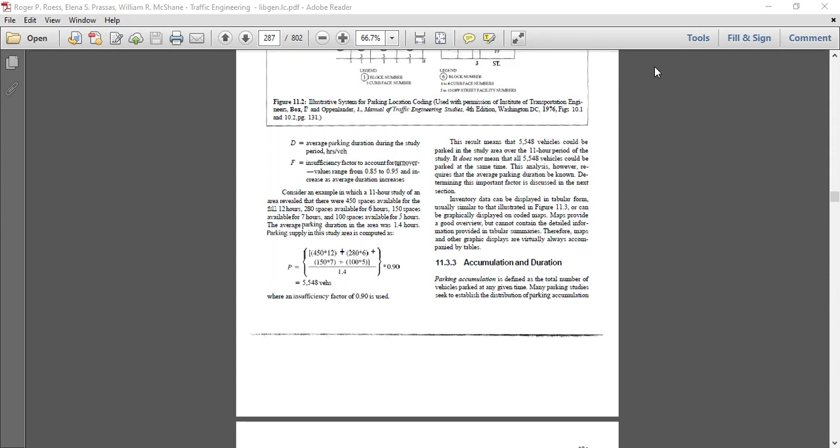Parking accumulation is defined as the total number of vehicles parked at any given time. Many parking studies seek to establish the distribution of parking accumulation over time to determine the peak accumulation when it occurs. Of course, observed parking accumulations are constrained by parking supply. Thus, parking demand that is constrained by lack of supply must be estimated using other means.

Nationwide studies have shown that parking accumulation in most cities has increased over time. Total accumulation in an urban area, however, is strongly related to the urbanized area population, as illustrated in the figure. Parking duration is the length of time that individual vehicles remain parked. This characteristic is therefore a distribution of individual values, and both the distribution and the average value are of great interest. Like parking accumulation, average parking durations are related to the size of the urban area, with average duration increasing with urban area population as shown in the figure.

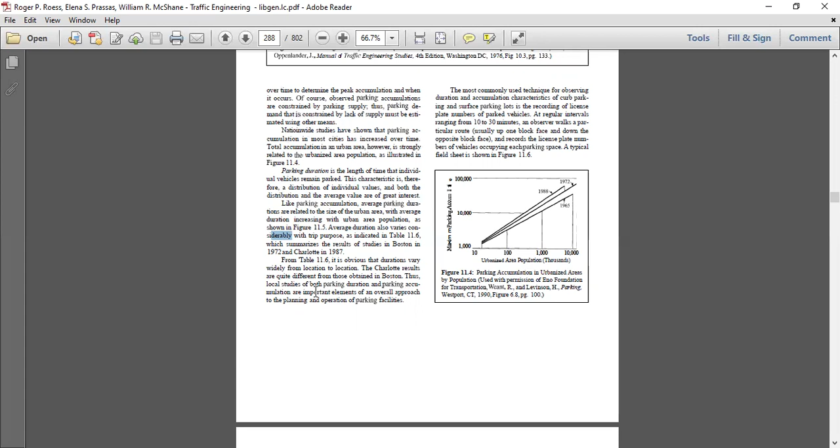Average duration also varies considerably with the trip purpose as indicated in the table, which summarizes the results of studies in Boston in 1972 and Charlotte in 1987. Okay, so accumulation totals. Each column of each field sheet is summed to provide the total accumulation of parked vehicles within each time period on each observer route. Duration distribution: by observing the license plate record of each space, vehicles can be classified as having been parked for one interval, two intervals, three intervals, etc. By examining each line of each field sheet, a duration distribution is created.

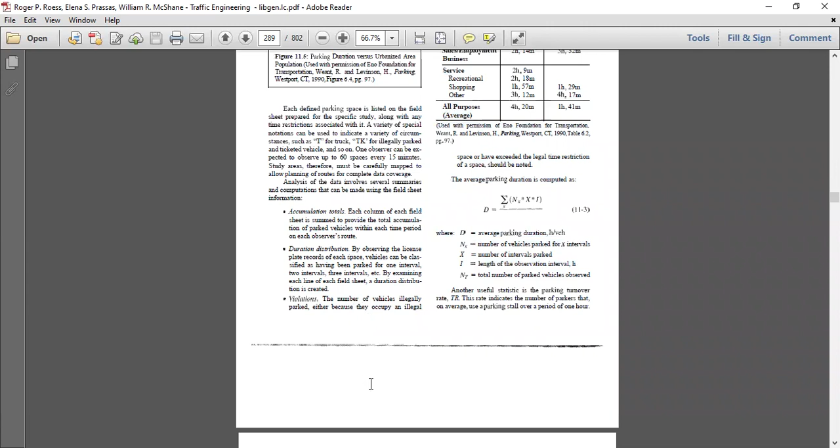Violations: the number of vehicles illegally parked, either because they occupy an illegal space or have exceeded the legal time restriction of a space, should be noted. The average parking duration is computed as D equals sigma of N_x into X into I, upon N_T.

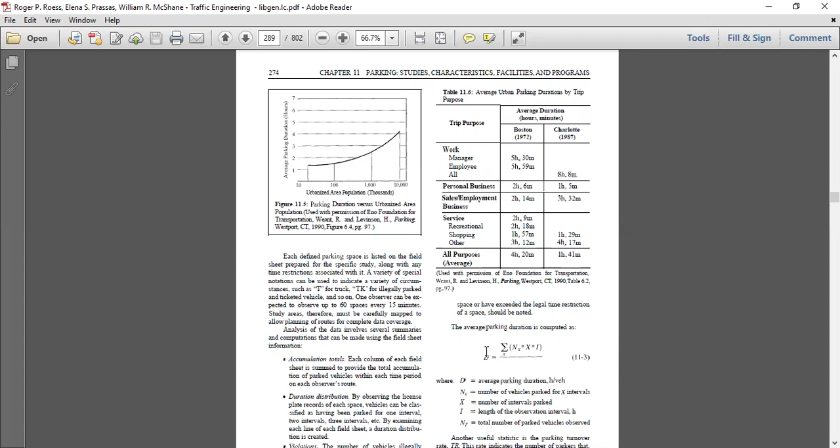Next, other types of parking studies. A number of other techniques can be used to gain information concerning parked vehicles and the parkers. Origin of the parked vehicle can be obtained by recording the license plate numbers of parked vehicles and petitioning the state motor vehicle agency for home addresses. This technique, which requires special permission from the state authorities, is frequently used at shopping centers, stadiums, and other large trip attractors. Interviews of parkers are also useful and are most easily conducted at a large trip attraction location. Basic information on trip purpose, duration, distance walked, etc. can be obtained. In addition, attitudinal and background parker characteristic information can also be obtained to gain greater insight into how parking conditions affect users.

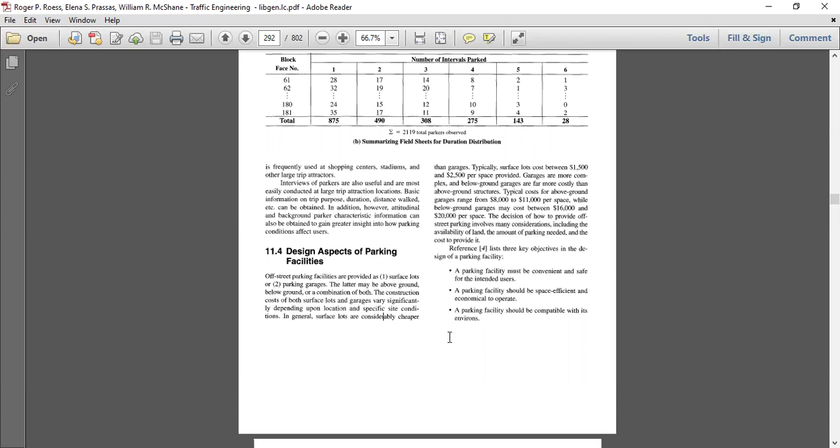Design aspects of parking facilities. Off-street parking facilities are provided as surface lots or parking garages. The latter may be above ground, below ground, or a combination of both. The construction cost of both surface lots and garages varies significantly depending upon the location and the specific site conditions. In general, surface lots are considerably cheaper than garages. Typically, surface lots cost between 1,500 and 2,500 per space provided. Garages are more complex, and below ground garages are far more costly than above ground structures. So this justifies the typical cost of on-surface parking and off-surface parking like above ground or below ground.

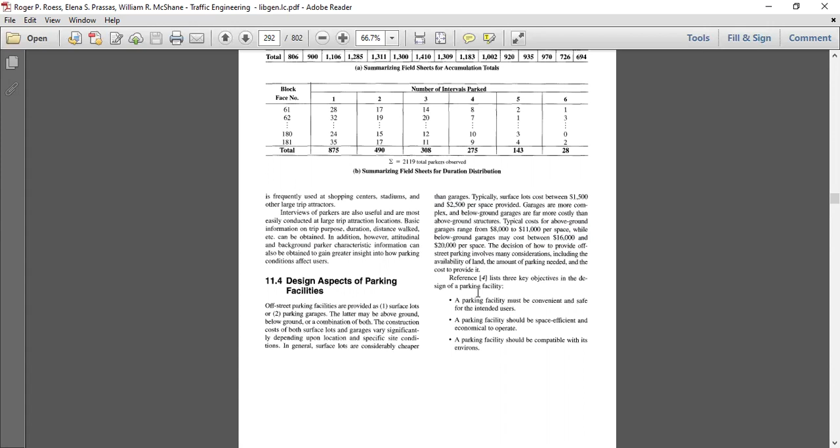A parking facility must be convenient and safe for the intended users. A parking facility should be space efficient and economical to operate. A parking facility should be compatible with its environs.

Convenience and safety involves many issues, including proximity to major destinations, adequate access and egress facilities, a simple and efficient internal circulation system, adequate stall dimensions, and basic security. The latter refers to security against theft of vehicles and security from muggings and other personal crime.

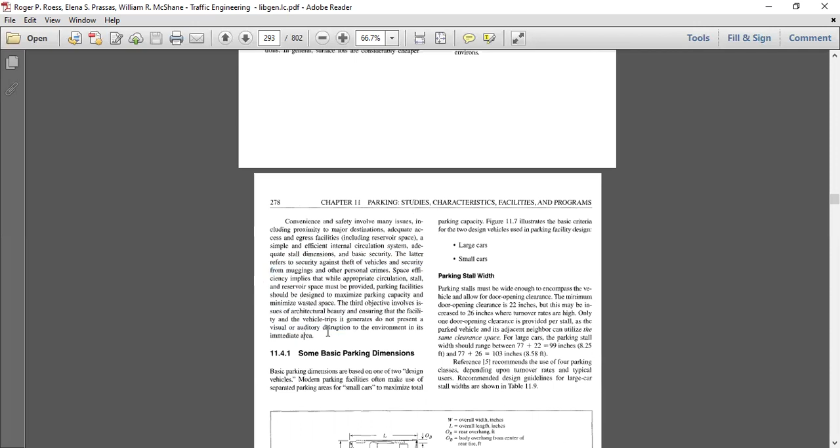Space efficiency implies that while appropriate circulation, stall, and reservoir space must be provided, parking facilities should be designed to maximize parking capacity and minimize wasted space. The third objective involves issues of architectural beauty and ensuring that the facility and the vehicle trips generated do not present a visual or auditory disruption to the environment in its immediate area.

Some basic parking dimensions. Basic parking dimensions are based on one of two design vehicles. Modern parking facilities often make use of separated parking areas for small cars to maximize the total parking capacity. The figure illustrates the basic criteria for the two design vehicles used in parking facility design, the large cars and the small cars.

Parking stall width. Parking stalls must be wide enough to encompass the vehicle and allow for door opening clearance. The minimum door opening clearance is 22 inches, but this may be increased to 26 inches where turnover rates are high. Only one door opening clearance is provided per stall, as the parked vehicle and its adjacent neighbor can utilize the same clearance space.

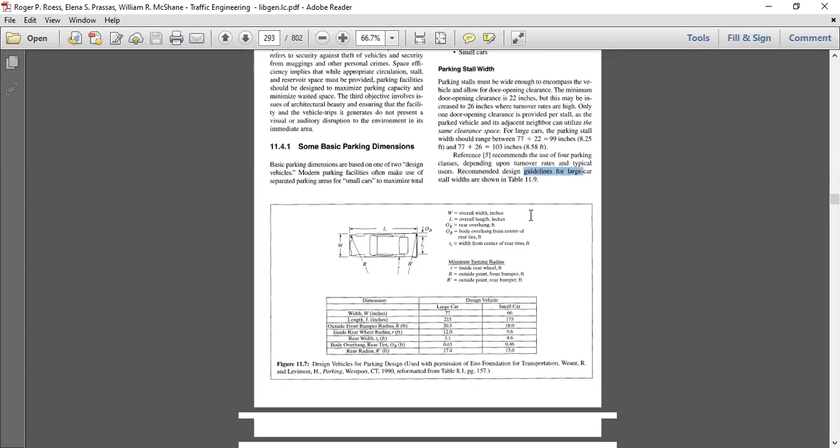For the large car, the parking stall width should range between 77 plus 22, 99 inches, and 77 plus 26, 103 inches. The reference recommends the use of four parking classes depending upon the turnover rates and the typical users. Recommended design guidelines for the large car stall are as shown in the figure.

For small cars, these guidelines suggest a parking stall width between 66 plus 22, which is equal to 88 inches, and 66 plus 26, which is 92 inches. A 7.6 feet design standard is often applied to small car stall widths. The reference suggests a design width of 8 feet for parking classes A and B and 7.5 feet for parking classes C and D.

Parking stall length and depth. Parking stall length is measured parallel to the parking angle. It is generally taken as the length of the design vehicle plus 6 inches for bumper clearance. This implies a length of 215 plus 6, 221 inches, for large cars and 175 plus 6, 181 inches, for small cars. The depth of the parking stall is the 90-degree projection of the design vehicle length and 6-inch bumper clearance.

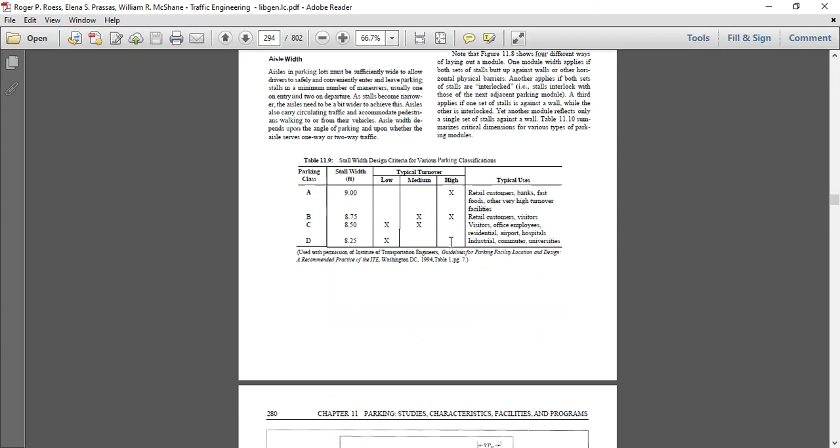For a 90-degree parking stall, the length and the depth of the stall are equivalent. For other angle parking, the depth of the stall is smaller than the length. Okay, so this is kind of the factual data.

The next is parking modules. Parking modules refers to the basic layout of one aisle with a set of parking stalls on both sides of the aisle. There are many potential ways to lay out a parking module. For 90-degree stalls, two-way aisles are virtually always used, as vehicles may enter the parking stall conveniently from either approach direction. Where angle parking is used, vehicles may depart in the same direction.

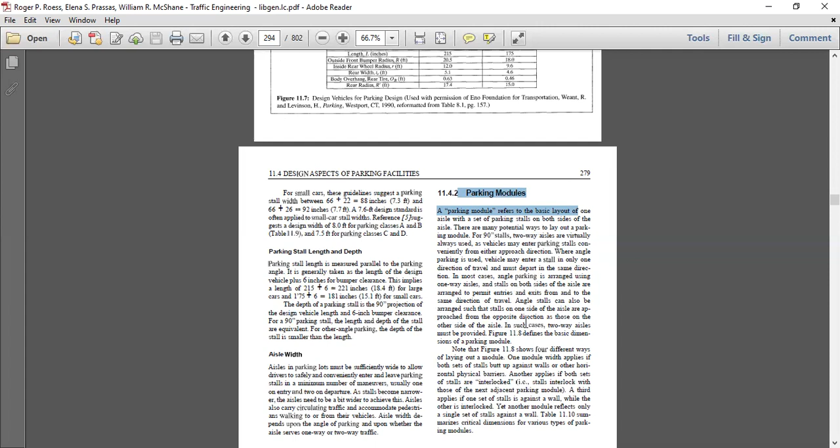In most cases, angle parking is arranged using one-way aisles, and the stalls on both sides of the aisle are arranged to permit entries and exits from and to the same direction of travel. Angle stalls can also be arranged such that the stalls on one side of the aisle are approached from the opposite direction as those on the other side of the aisle. In such cases, two-way aisles must be provided.

Note that the figure shows four different ways of laying out a module. One module applies if both sides of the stalls butt up against a wall or other physical barriers. Another applies if both sides of the stalls are interlocked. A third applies if one set of stalls is against the wall while the other is interlocked.

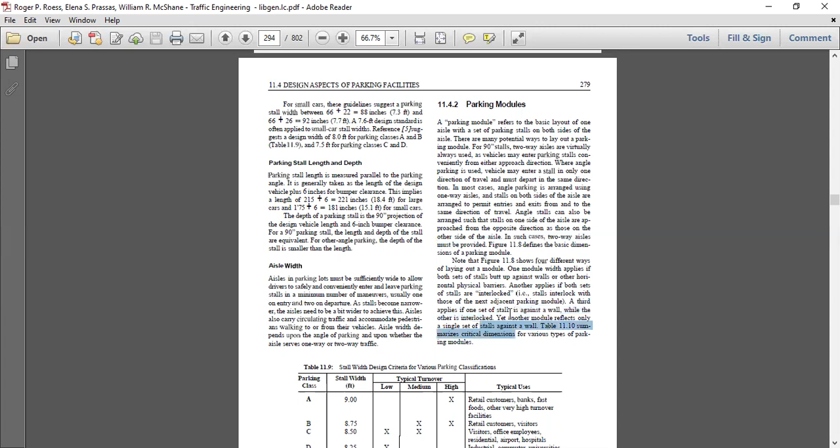Yet another module reflects only a single set of stalls against the wall for the various types of parking modules. Providing separate parking areas for large and small vehicles presents a number of operating problems. Areas must be clearly signed and circulation must allow drivers to easily get to both types of parking space, as the mix of small and large cars is variable.

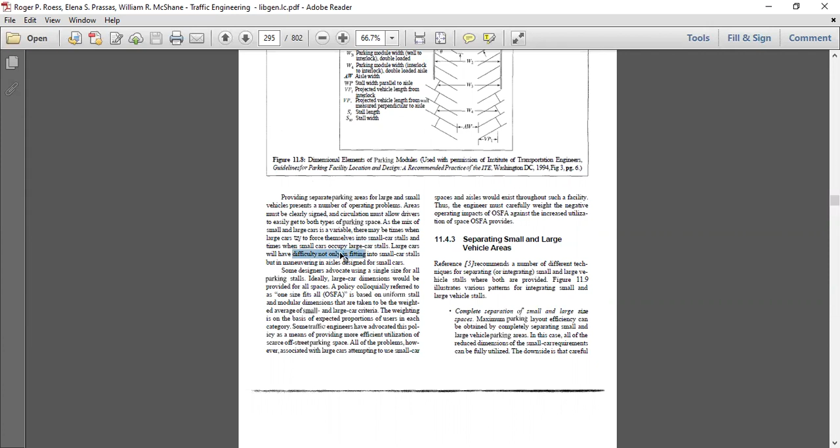There may be times when large cars try to force themselves into the small car stalls, and times when small cars occupy large car stalls. Cars will have difficulty not only in fitting into small car stalls, but in maneuvering in aisles designed for small cars. So this is kind of the parking modules.

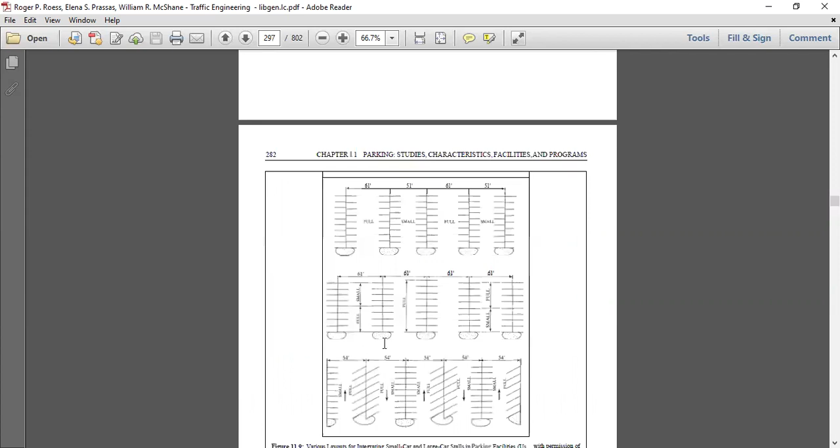Okay. So the last topic is parking problems. Every urban governmental unit must have a plan to deal effectively with the parking needs and associated problems. Parking is often a controversial issue, as it is of vital concern to the business community in general, and the particular businesses that are especially sensitive to parking. Further, parking has an enormous financial aspect as well.

In addition to the impact of parking on the accessibility and the financial health of the community at large, parking facilities are expensive to build and to operate. On the flip side, revenues from parking fees are also enormous. The public interest in parking falls within the government's general responsibility to protect the health, safety, and welfare of its citizens.

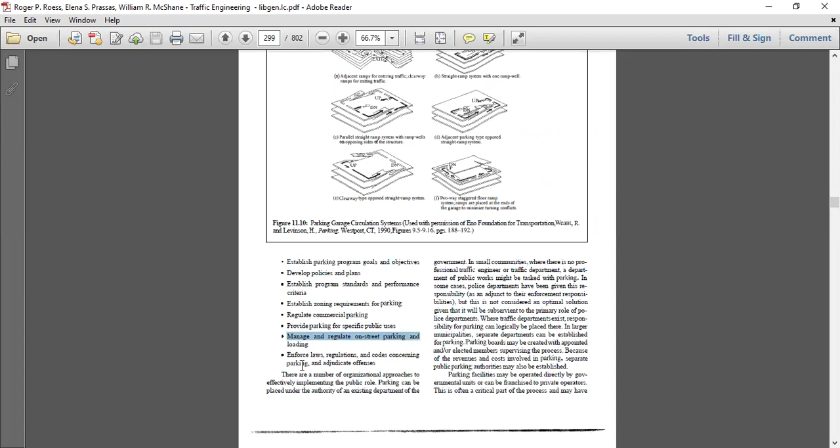Thus, the government has a responsibility to establish parking goals and objectives, develop policies and plans, establish program standards and performance criteria, establish zoning requirements for parking, regulate commercial parking, provide parking for specific public uses, manage and regulate on-street parking and loading, and enforce laws, regulations and codes concerning parking and adjudicate offenses.

There are a number of organizational approaches to effectively implementing the public role. Parking can be placed under the authority of an existing department of the government in small communities where there is no professional traffic engineer or traffic department. A department of public works might be tasked with parking. In some cases, police departments have been given this responsibility, but this is not considered an optimum solution, given that it will be subservient to the primary role of the police department.

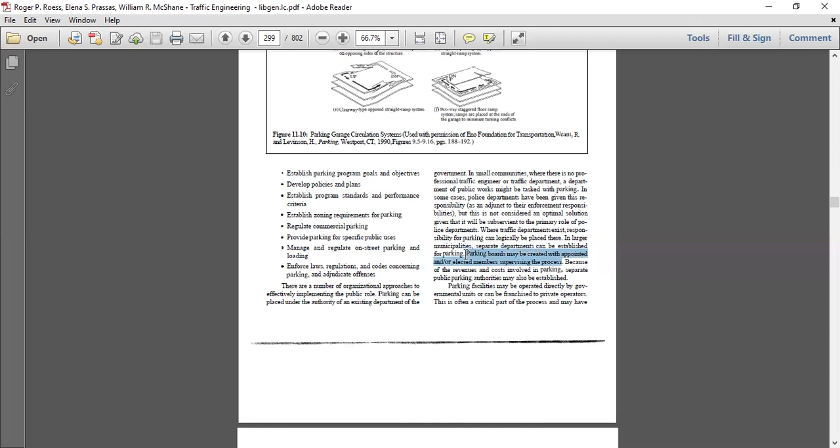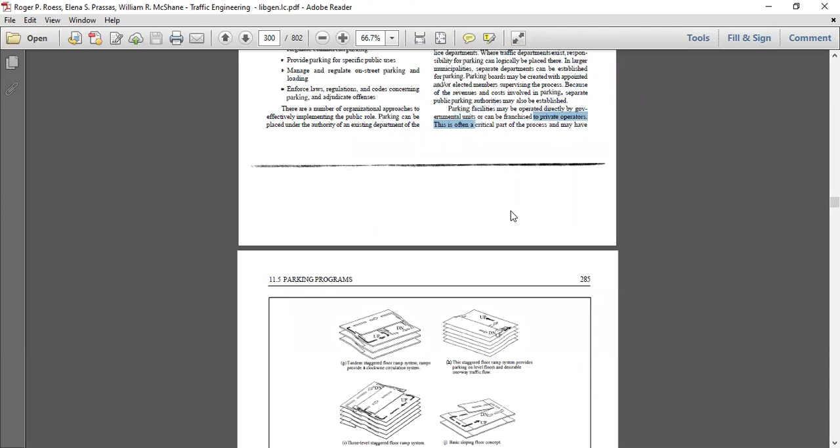Where a traffic department exists, responsibility for parking can logically be placed there. In larger municipalities, separate departments can be established for parking, or boards may be created with appointed or elected members supervising the process. Because of the revenues and the costs involved in parking, separate public parking authorities may also be established. Parking facilities may be operated directly by governmental units or can be franchised to private operators. This is often a critical part of the process and may have a substantial impact on the net revenues from parking that find their way into the public coffers.

Parking policies vary widely depending upon the local circumstances. In some major cities, parking supply is deliberately limited, and the costs are deliberately kept high as a discouragement to driving. Such a policy works only where there is a significant public transport supply to maintain access to the city's business.

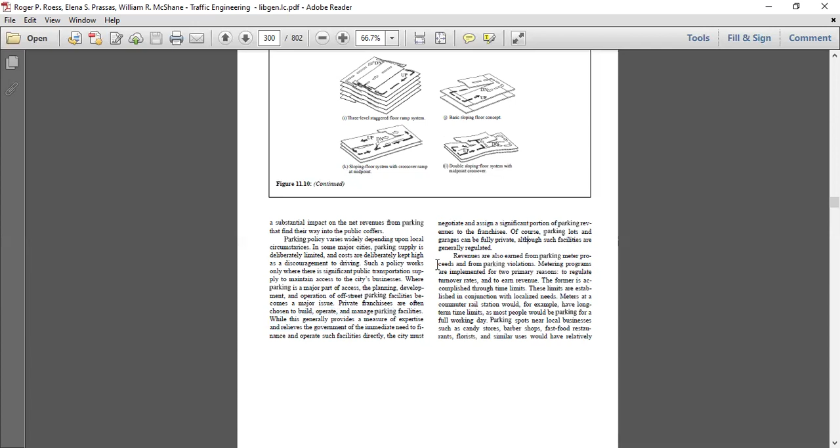Where parking is a major part of access, the planning, development, and operation of off-street parking facilities become a major issue. Private franchisees are often chosen to build, operate, and manage parking facilities. While this generally provides a measure of expertise and relieves the government of the immediate need to finance and operate such facilities directly, the city must negotiate and assign a significant portion of the parking revenues to the franchisee. Of course, parking lots and garages can be fully private, although such facilities are generally regulated.

Okay, so here our parking studies chapter is completed.